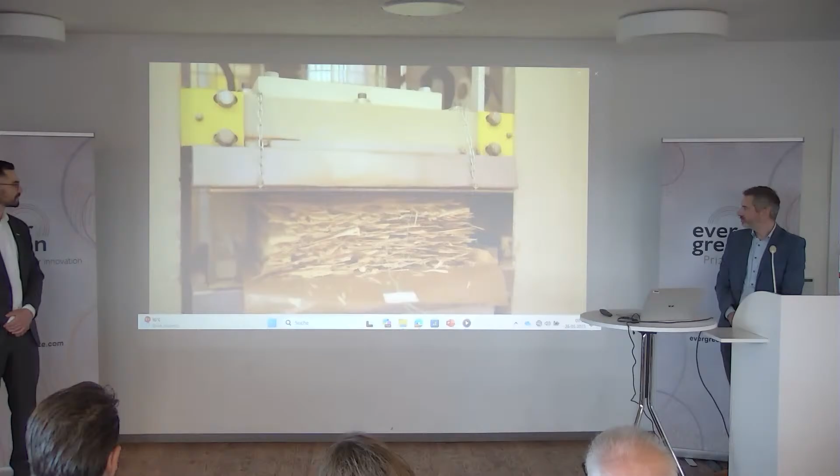At Boku University in Austria, a research team led by Max Pramreiter focuses on the use of branch wood as a raw material. A 3-dimensional measurement captures the geometry of the entire tree with special attention to its branches. The aim is to process this irregular and curved resource into high-strength wood-based products. The branches are processed into strands, which are dried, sorted, and pressed. Stranding is a very efficient technique from the OSB process, recovering up to 95% of the input material. However, branch wood, especially from hardwoods, has not been used this way before. The potential of the material is determined by meticulous analysis throughout the entire process, beginning at the nanometer scale and extending to the macroscopic structure of the tree. Their work lays the scientific foundation for integrating branch wood into long-lasting wood construction products such as panels, beams, and future composite materials.

Dear esteemed scientific jury, good morning to everyone in the audience, good morning to everyone attending this prize event online. For Max and myself, it's a great honor to be here today and present in front of you and answer your questions. Honestly, yes, I'm very excited, especially as a PhD student.

But there is one thing I'm even more excited about, and that is the figure of 3 trillion. There are about 3 trillion trees on this planet doing all these great things that are vital for us humans. Statistically speaking, that means about 400 trees per person - 400 trees for Max, 400 for you, 400 for me. And if you visualize your 400 trees, they do not only consist of stem wood, but also huge amounts of branch wood. These branches are the main focus of the next minutes.

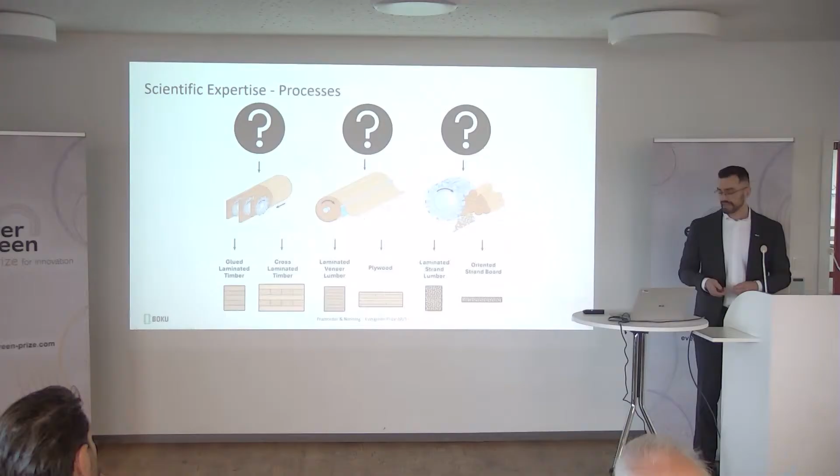Thank you, Tobias. I think you're absolutely right. I'm not the only expert on disintegration technologies, but I spent a lot of years investigating established disintegration technologies for current engineered wood products. Right around the time the Evergreen Prize was announced, we were revisiting existing technologies to disintegrate branch wood. As wood technologists here might know, the sawmilling process and the veneer peeling process require homogeneous raw materials.

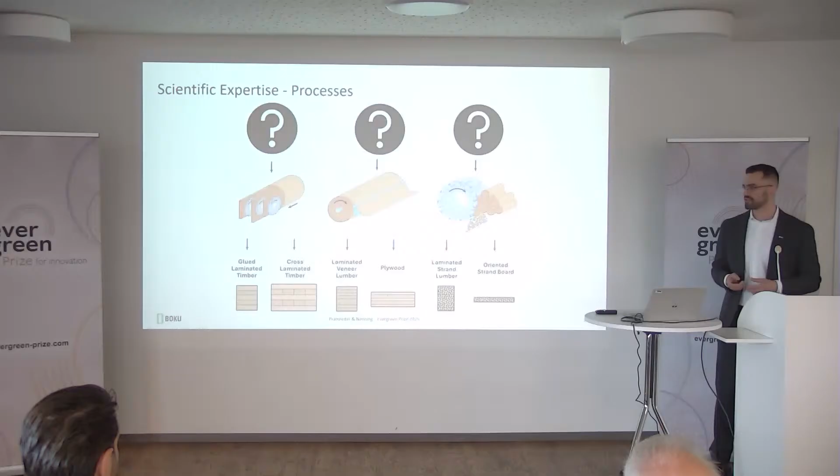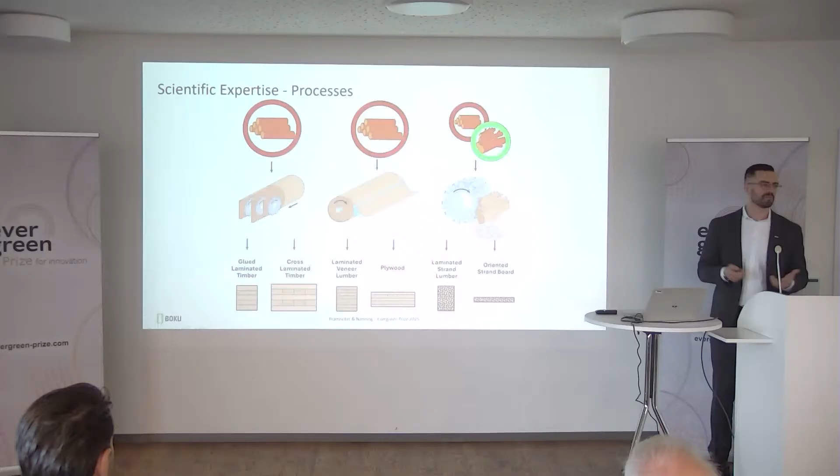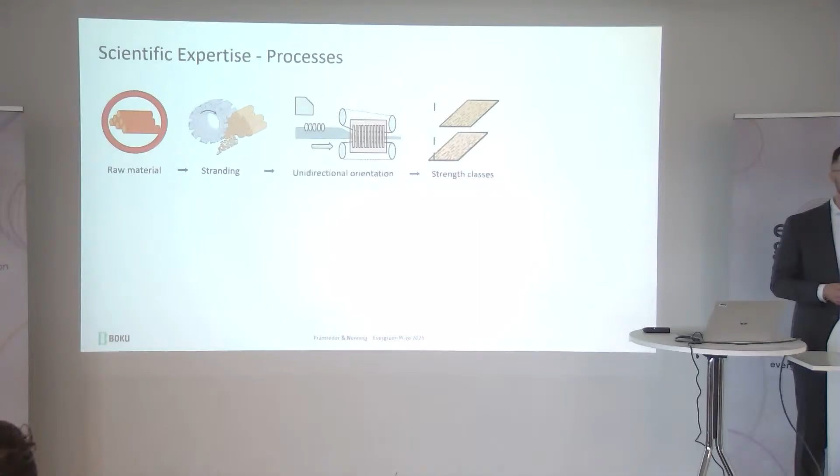Luckily, we also have experience already improving the stranding process and the products from it. While Tobias was looking at branches, two of our other PhD students, Lucas and Andre, who is here today as well, so you can talk to him in the break if you want,

were looking into improving the application potential of strand-based products. In a project called Unistrand, led by Professor Konnerth, around 15 project partners are trying to improve the application potential by unidirectionally orienting the strands, and by creating different density panels, also improving the range of strength classes we can use.

Furthermore, the aim here is to create an intermediary product that can be used for a cross-laminated composite, and that can exist alongside the current shooting star in wood construction: cross-laminated timber.

From literature, we know that with panel density we can also change the performance of the panels, and we try to build on this knowledge by adding the unidirectional orientation.

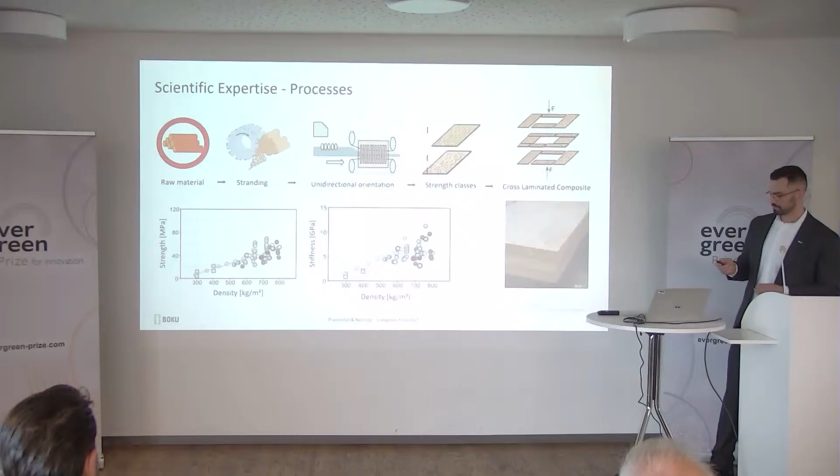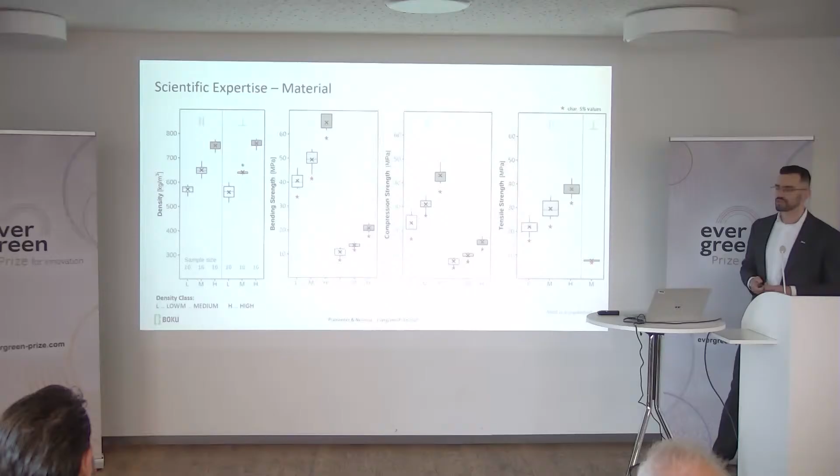Most recent findings from Lucas, which I want to show quickly, show that, I guess not a big surprise, we were able to create different density panels. But the interesting part, and I think the biggest takeaway here, is that we are actually able to create different strength classes along bending, compression, and tensile strength, and the same for the modulus. If you look at the red stars, you can see we are actually able to design strength classes depending on the purpose and final application. Therefore, we can use the material more resource efficiently, only where it's actually necessary.

The way forward: when the Evergreen Prize was announced, we thought this combination of projects, Unistrand and Strong Hardwood, might be the right case for applying to it. As both projects are ending this year and funding is limited, in order to combine this knowledge into Branch Up, we need additional funding.

If awarded, we will create a new project team, hiring a new PhD candidate. This is also where most of the funding will go, paying the salary of this PhD candidate. The project team at BOKU will be complemented by Tobias and myself, and academic supervision will be provided by Professor Konnerth. The PhD student will also be embedded in the doctoral school Built Nature at BOKU, which covers the whole range of construction, so they will have access to an interdisciplinary team of supervisors as part of their advisory team.

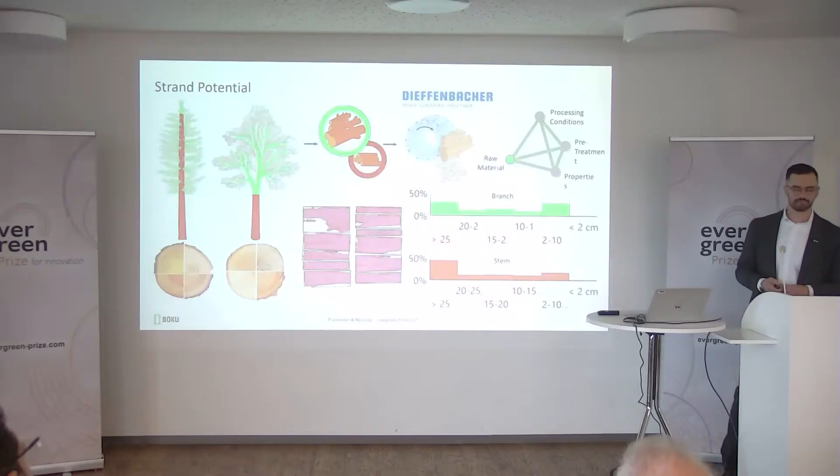As an example, one important factor is the length of the strands in strand-based products, as slenderness drives performance as well, and we expect the branch strands to have higher variability across different length classes. At the end of this work package, we also expect a certain data set that can be used for modeling this material, as we have an intermediary product described.

With the remaining strands, we will create different panels at BOKU University using the same process or procedure that we developed for Unistrand, giving us a big data set to compare it to as well.

Following this, mechanical as well as physical characterization will take place. The physical characterization will include thickness, swelling, and internal bond strength as key characteristics for engineered wood products, on top of tensile, compression, bending, and shear tests.

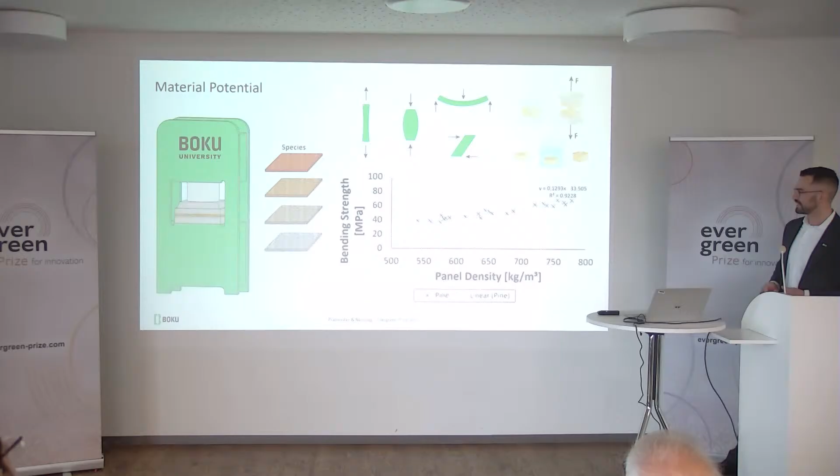The hypothesis here is, if we take pine as a reference at different compaction ratios resulting in different densities, we expect that the strands and panels from branch wood will sometimes perform better than the panels from stem wood, and probably some will not reach the current benchmark.

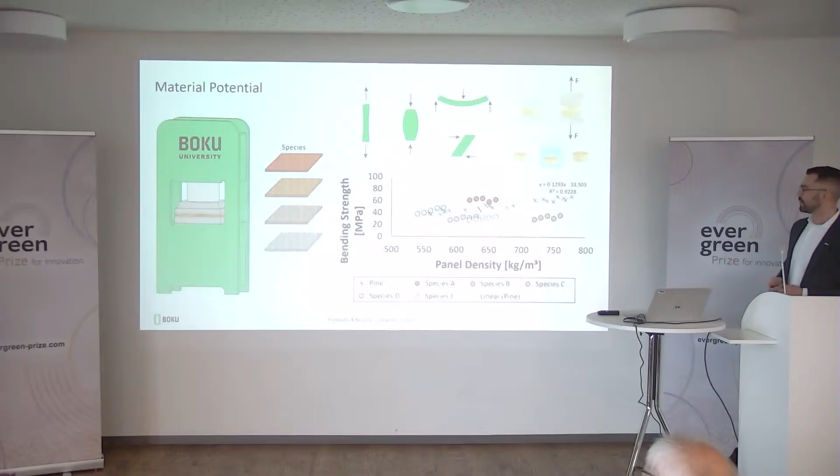Last but not least, together with Dieffenbacher, we will decide on a range of density classes, coming back to the different strength classes again, and a range of mixtures. What do I mean by mixtures? We know from literature that mixing different wood species into one panel, we can offset the downside of one by the other a bit.

So we talked a lot about the scientific details of branch-up, the previous projects, and what we want to do in the next 3 years. To sum this up on one slide, we would say branches have technological potential. So let's branch up together and help move from a burn to a build mentality for this undervalued resource.

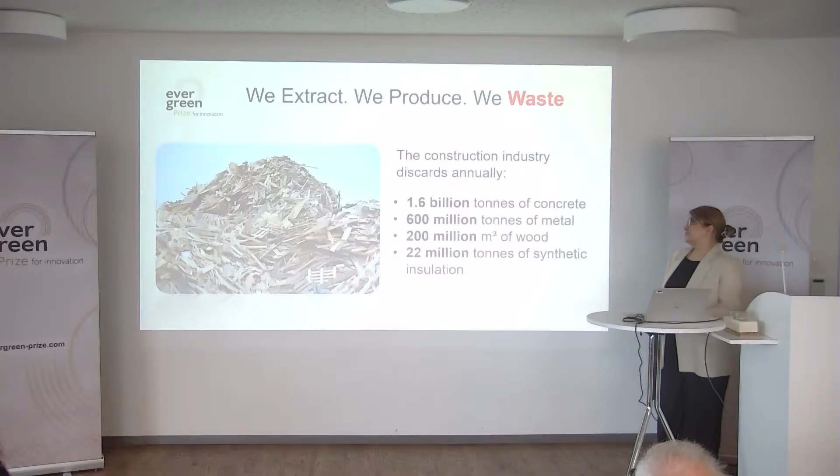And then we produce. All these materials are turned into something that we build our cities with. We build large, we build very fast, but without so much thinking of what comes next. We also produce a lot of waste. Construction industry generates mountains of discarded waste. Concrete, metal, wood, they are usually thrown away or treated like they are endless. So in general, we extract, we produce, we waste - a one-way path that our planet or nature can't take anymore.

And it's not only about the material intensity of our construction industry, it's also about the emissions. Construction industry is producing almost 11 billion tons of greenhouse gases every year. And it's not only about the CO2 that we are hearing every day. There are other gases, thousands, 100 times more potent than CO2, like methane and also nitrous oxide. So it's not only a material crisis, I would say, it's a climate crisis.

So what sort of future do we want to build for ourselves, for the next generation to come? That's our vision: to create a world where resources are valued, waste is minimized, and nature thrives for the next generation to come. To have such a beautiful world, what are the alternatives that we have?

We just take a look at wood waste as an example. Every year, millions of tons of wood waste are generated. In Europe alone, in 2020, almost 50 million tons of wood waste was generated. Almost 53.5% was burned for energy recovery, and only 46% were recovered to material, something like particle board. And of course, energy recovery is important, but material recovery should come first, because every gram we reuse, it's almost 2 grams of CO2 that we store, we keep in the material for a longer time.

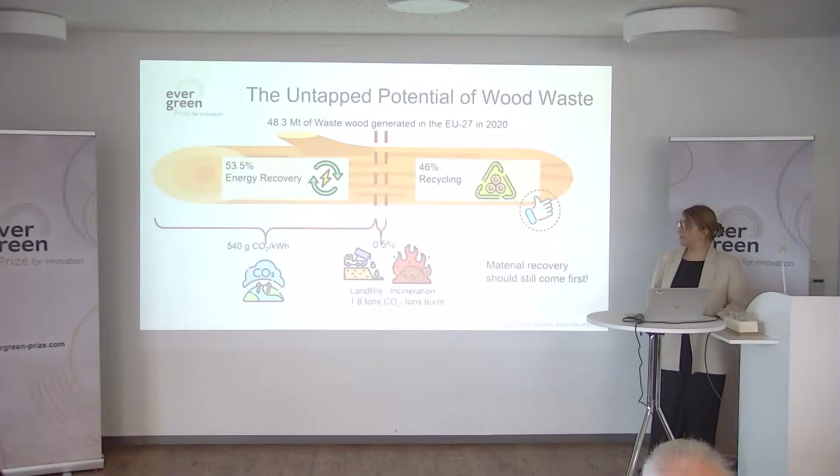And that's what nature does always. Nature wastes nothing. Everything is recycled, is repurposed, and it's regenerated. And that's what we should do from now on.

So what if we turn to a regenerative material which turns back to the earth, which is built in harmony with our planet, with our nature? So we can start with using waste more than what we do and bind them together without anything additional, just with the help of nature.

So in our experiment, we are exploring ways of using regional, local wood waste and agricultural waste collected from sawmills, from furniture producers, from discarded pallets, and also the byproduct of agriculture industry like hemp and miscanthus, combining them with mycelium, the root network of mushroom, to create a regenerative bio-based material.

So the core innovation lies in mycelium. It's not us, it's nature who does the job. But why are we so much interested in that? Because it has this self-adhering property to the fibers. It forms beautiful cross-links with the substrate, so it acts like a glue. It grows really fast, and it's also using really low energy.

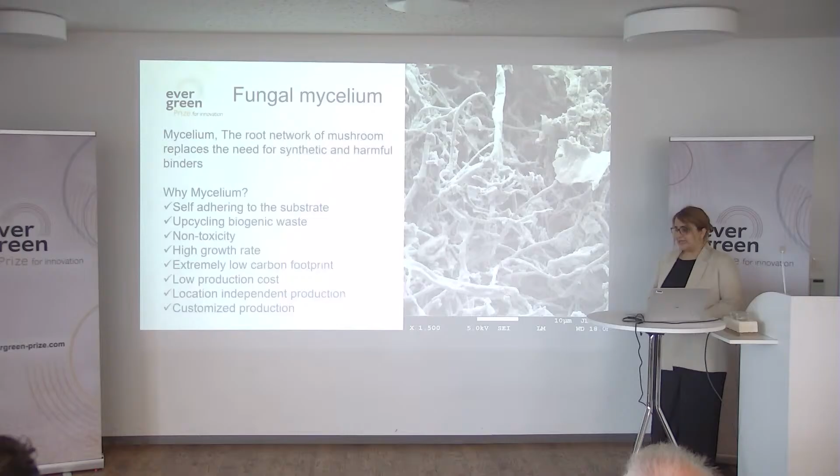So at the end, it turns waste into a material which is 100% bio-based and recyclable. So we have a local, low-cost, and low-carbon material. It's perfect for what we need for our future.

But it's not only any type of mushrooms or fungi that we use. We are mainly focusing on wood decaying fungi. That's what we usually see when we walk into the forests. They are our ecosystem recycler or ecosystem engineer, and our main focus is on white rot fungi. They're digesting these tough plant fibers like lignin and cellulose through an enzymatic pathway.

If we look at this time lapse taken by us, not in the most professional way, we see how mycelium grows. It grows into the wood, around the wood, and it forms this 100% bio-based composite, which is safe, which is scalable. It's waste not burned to pollution, but turned to possibilities.

So thank you, Nas, for telling us about how we need mycelium-based materials made from mushrooms. Next, I'll be telling you more about the properties and also the production process of this material.

As you saw in the video, when the fungi is added to the particle substrate, it grows and spreads very quickly, turning the substrate with the mycelium into a block piece of material. This is a very lightweight piece of lignocellulosic foam.

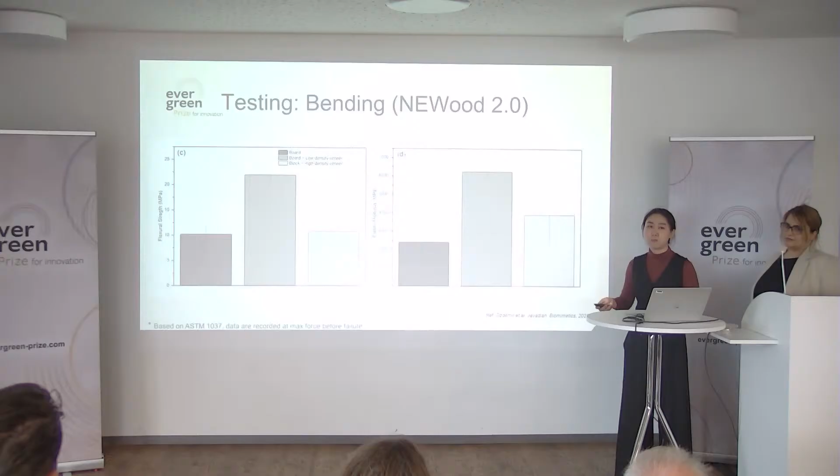We have also conducted some preliminary fire testing, and what we found was that the light material, the very low density material, is actually a very good insulator. This is because there are many air pockets in the material, and that helps insulate the heat from the inside and the other side of the material during testing. We also found that it does not emit any harmful or toxic gases into the environment because it's completely natural, so you will not have that strange mixture of nitrous oxide and other harmful gases mentioned by Nas just now.

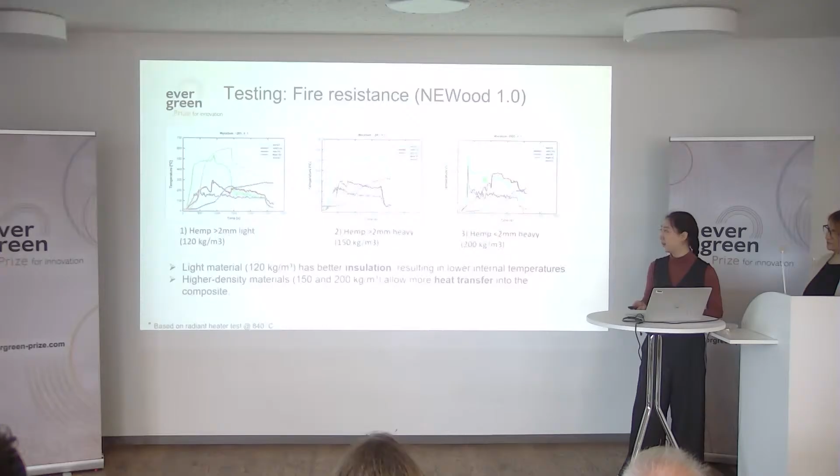We also compared the performance of NEWood against other commercially available, functionally similar materials. For NEWood 1, we compared it with rock wool, a very common insulation material used in buildings nowadays, and found that it has very similar thermal conductivity and sound absorption properties. It is denser than rock wool, but the strength is that it is actually much stronger, giving it self-supporting and better structural stability properties.

We also compared NEWood 2 with medium density fiber boards and particle boards, and found that it has very similar strength and density to these conventional building materials. Because of this, we are very confident that we can apply this to many different commercial applications that currently use medium density fiber boards and particle boards.

When we talk about green materials, we have to think critically about whether it is really good for the environment. So we conducted a life cycle assessment on our material. We modeled the production process of our mycelium-bound composites into three different stages, and for each stage we calculated the inputs and outputs. The three stages are: the growth and culture stage, the incubation and inoculation stage, and the processing stage for the final products.

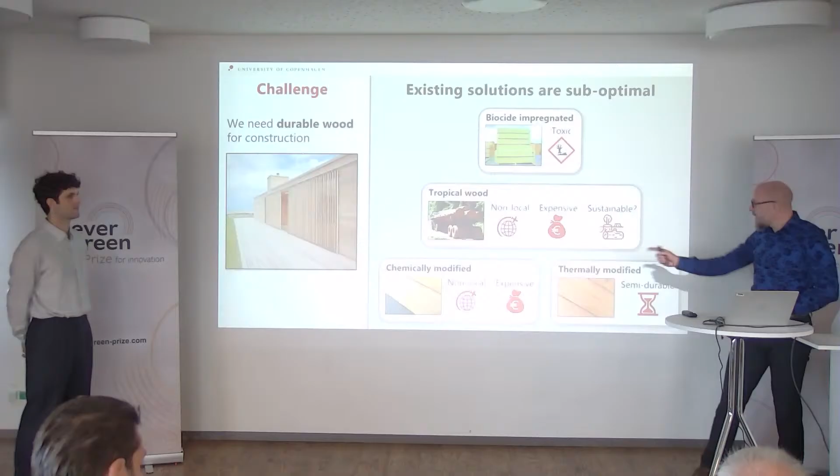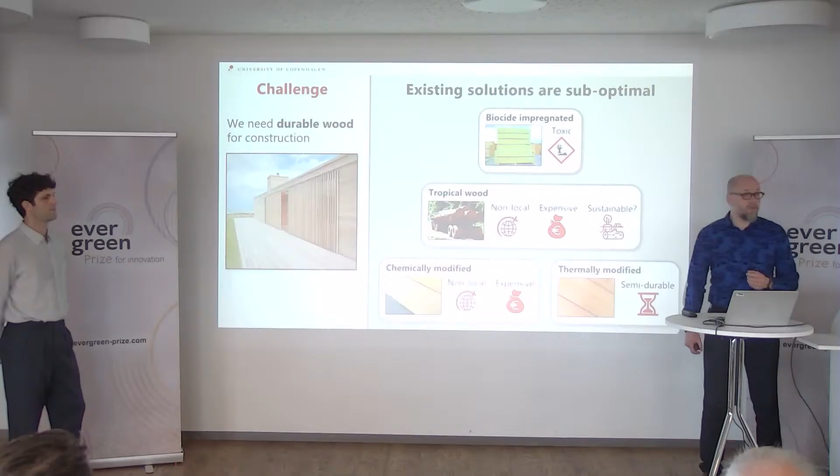Of course, we have modified wood products on the market, like chemically modified wood, which is high performance material. But these are also based on non-local wood species, and they are quite expensive. And thermally modified wood is only semi-durable, and it's not good for ground contact. So we need new solutions for durable wood in outdoor environments.

Around the time that I made this living fence around our fire pit, there were some interesting things happening in our labs. Our team has for years worked on lignin.

Lignin is a main component of wood, and it's also the component that protects the material from fungal decay by making the wood less attractive as food for fungi. Many fungi would not even touch lignin. Lignin is also a large-scale byproduct from the paper industry that has so far been difficult to utilize because it's very heterogeneous and insoluble in water.

But our team discovered a way to fully solubilize lignin, all of it, to make stable, highly concentrated solutions of lignin, up to 65% lignin, using just simple mixtures of water and alcohols.

These solutions were initially intended for use as fuels, but we thought, hey, since lignin has such interesting properties when it comes to protecting wood from fungal attack, could we perhaps add more lignin to wood and gain more of these protective qualities?

And that's why we called upon Andrea to help us out, to see if these novel lignin solutions were any good. Could we impregnate wood with them?

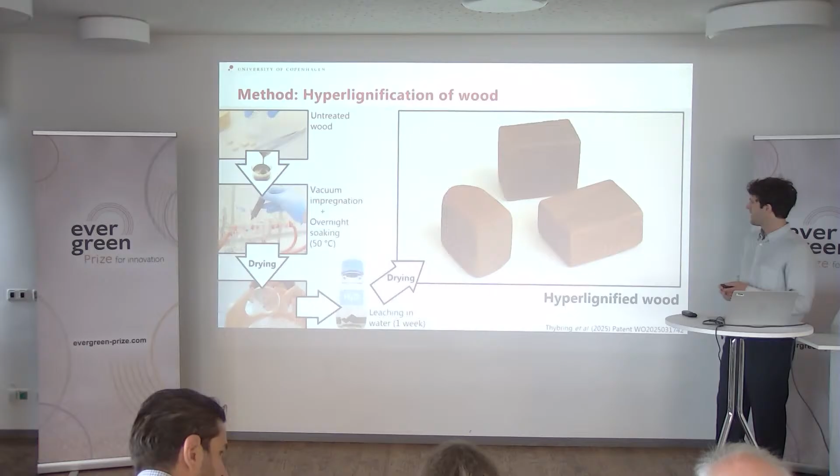So this is what we got at the end, and it really felt like deep penetration, and we call this hyperlignified wood. But how much lignin did we squeeze into the wood?

A lot. The mass gain was also very surprising and unbelievable at first glance, so we reached almost double the weight in some species. We tested this hyperlignification across several species, broadleaf and conifers, and even after leaching, the lignin stayed in the wood.

So then we wanted to know how this would affect the properties. One of the key properties we wanted to address was hygroscopicity. So we used water contact angle, and we exposed the cross section, which is the section that most readily absorbs water, of our samples, both untreated and hyperlignified wood.

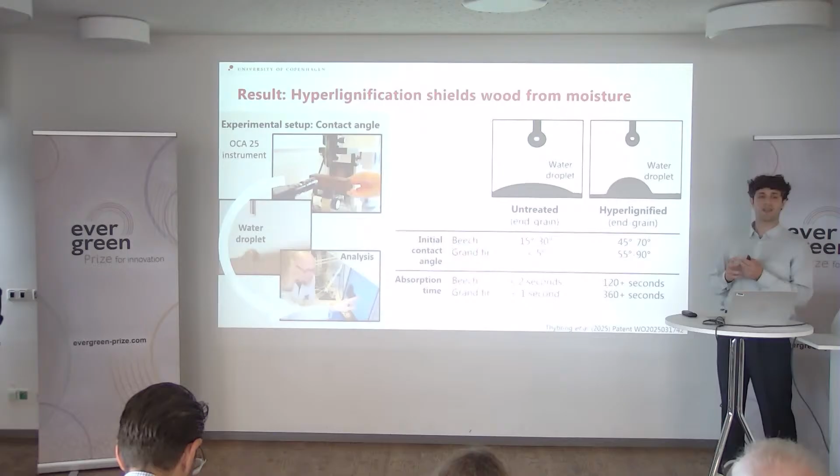We saw that these droplets that we were dropping on the surface were being readily absorbed by the untreated samples within 1 to 2 seconds, while for the hyperlignified wood, it takes minutes to absorb. So the energy of the surface is lower, meaning higher hydrophobicity.

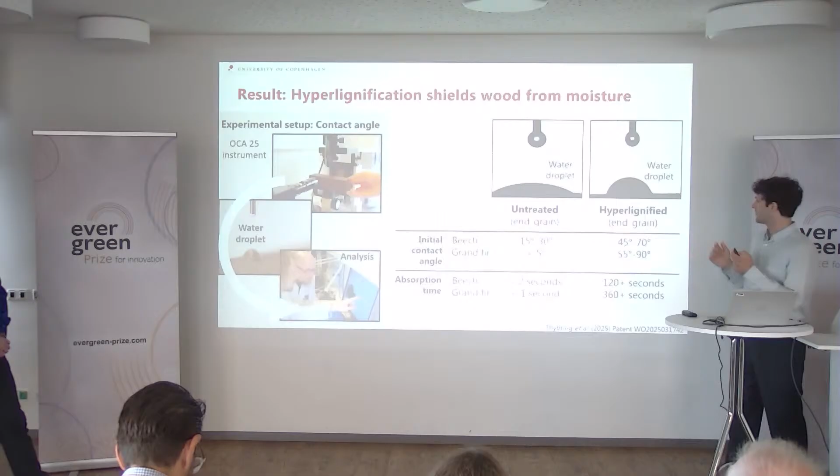Then we took it a step further, and we wanted to address the durability. How does this wood behave against fungal attack? That was our main question to address.

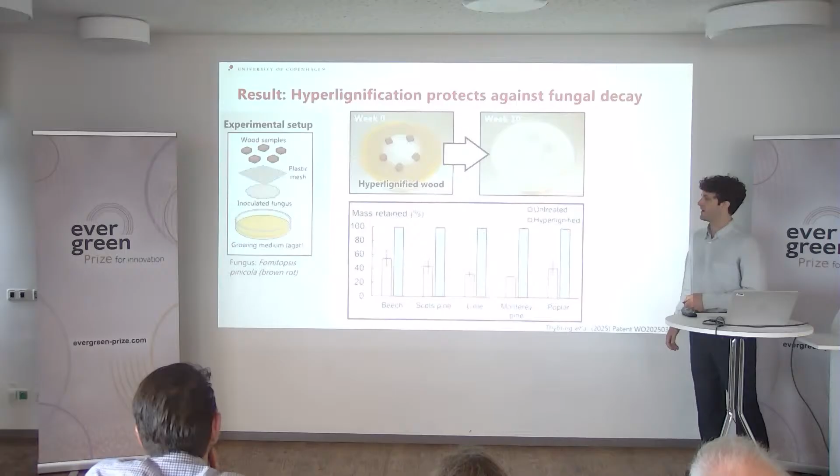So we set up a fungal decay experiment, and we used one very aggressive fungi that we had tested in our lab before, Fomitopsis pinicola brown rot, and we exposed the samples to this brown rot for over 10 weeks.

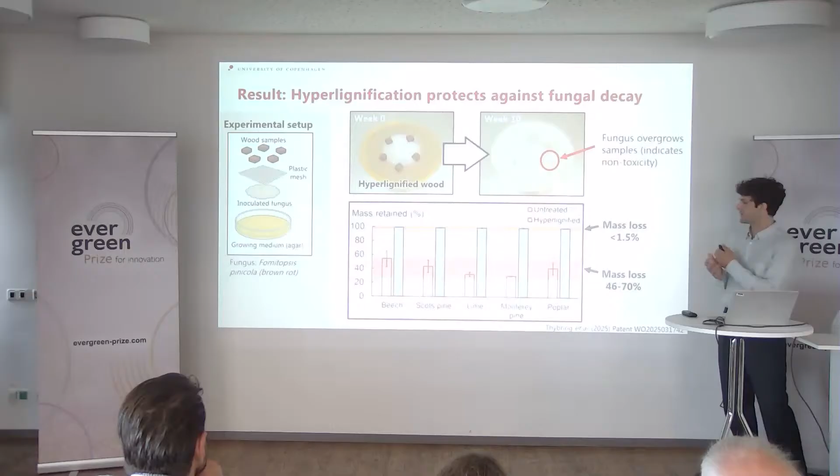What we see here is hyperlignified wood after 10 weeks, and actually the fungi could overgrow the samples, which is an indication that it is non-toxic. The hyphae could grow around the wood. But when we looked into the mass retained or mass loss in hyperlignified wood across all the species we tried, the wood was barely untouched, while for the untreated samples there was huge mass loss after 10 weeks.

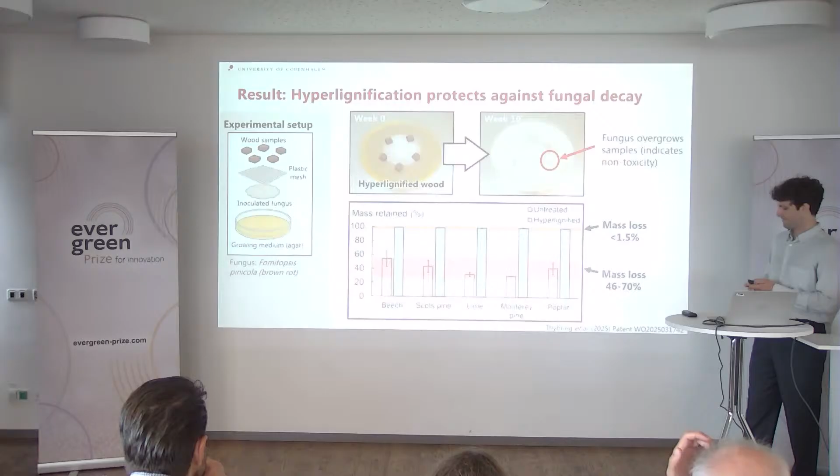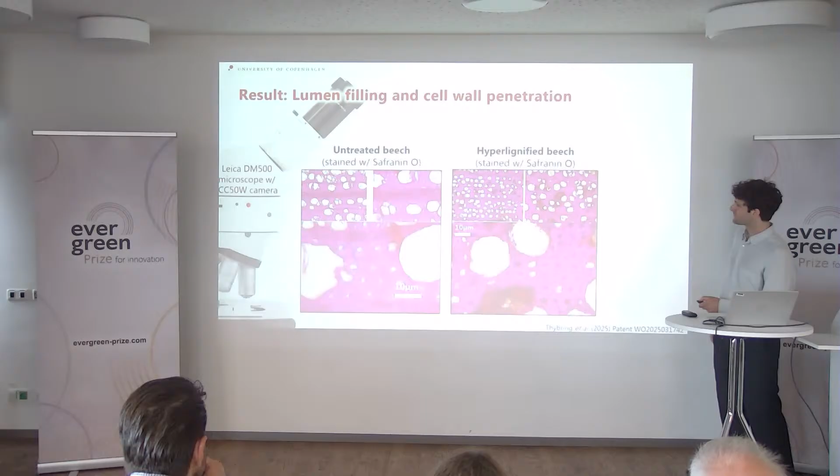How did these work so well? So we literally zoomed in, we took microsections and used a stain, safranin, which targets lignin substructures and makes it look purple under our eyes. And what we saw here was quite revealing, because we could see that the lignin impregnates the voids, which are the large vessels and small fibers.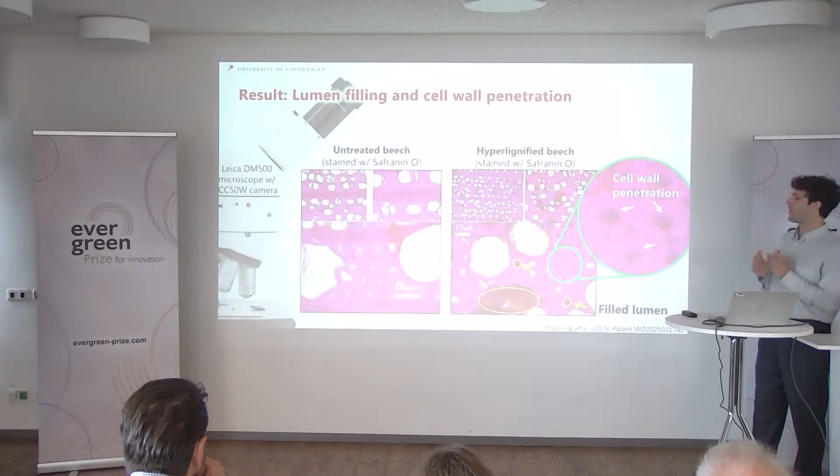So the lumen of the fibers and vessels were impregnated. But not only that, if we zoomed in, we could see there is a darkening around the cell wall, meaning that this penetration is not just surface level or blocking. So we are modifying the structure, and we think this is the key for the long-term durability we see.

But lignin is not very homogeneous out there, so there are lots of types. Do they all work? We tested several and found that the ones that work best are the ones that are less water soluble, because the others don't stick very well to wood. Luckily, kraft lignin is one of the main byproducts from pulping and paper companies, so what we are actually using is the one most readily available in the market.

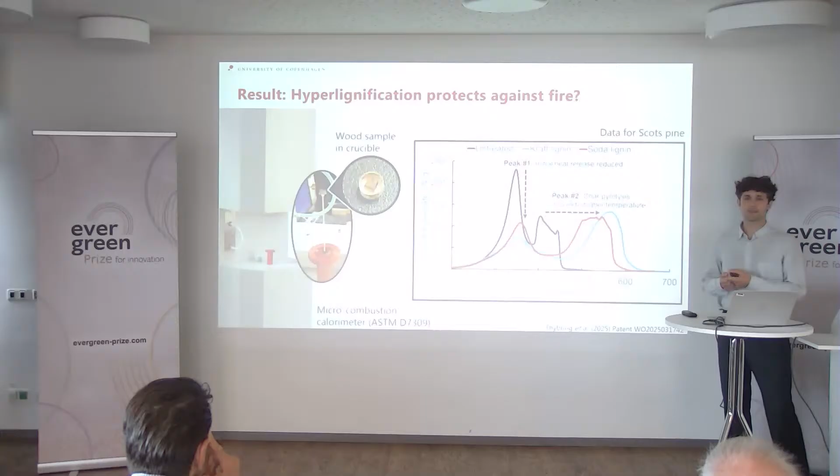Then we wanted to test fire retardancy, and we saw with microcombustion calorimetry that the initial heat release was reduced when we burned hyperlignified wood, while the char pyrolysis peak moved to higher temperatures, meaning that not only did we improve the fungal decay resistance, but here we are also seeing an improvement in fire retardancy of the wood.

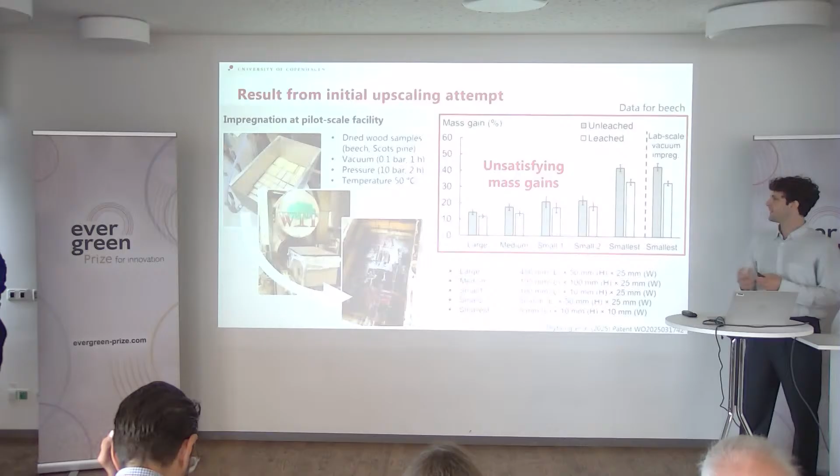And then we took a step forward, and in a first attempt tried to upscale this, going to an industrial facility and asking ourselves if we could just plug and play into an existing facility. We brought our small samples, but also larger samples, to a pilot scale industrial facility, using pressure and temperature of 50 degrees, nothing fancy. We saw that although we got unsatisfying mass gain in some larger samples, lower than small scale, the key point was that we were able to use the facility without changing parameters, without big modifications, and with no safety hazard.

So very excited about this. We came back to the lab thinking, okay, now we need to improve this impregnation at larger scale, but we need a lab to do so. So we developed a larger vessel for impregnation of larger, longer samples. And yeah, this is what we're doing at the moment.

Our aim is to reach the mass gain we saw at small scale, and we're not too far from there. For example, with each sample we even have higher mass gains than the smaller samples. Yes, and you have samples in front of you in the jury.

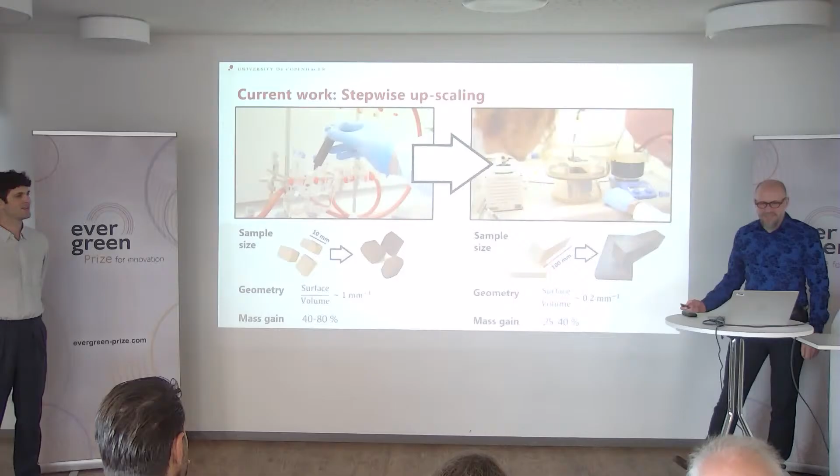So clearly there's more to do, more to explore, because hyperlignification with lignin solutions is such a new research topic. So in the next step, we want to focus on some fundamentals, like the effect of lignin size and lignin chemistry, and how these lignin solutions are transported in the wood anatomy and how they interact with the material. Let's take the first one first: the effect of lignin size and lignin chemistry.

I know this is a busy slide, but please bear with me. In order to investigate this, we want to try to reduce how heterogeneous lignin is when you get it from the paper industry, because when you get it from the paper industry, it's a zoo of lignin molecules of different sizes and chemistries.

So we want to use solvent fractionation, a method that utilizes the fact that the solubility of lignin molecules in a specific solvent depends on the size and the chemistry. By having different solvents and using them sequentially, we can split up this initial broad size distribution, this initial soup we have, into different lignin fractions that are more well defined with a narrower size distribution, making these fractionated lignin solutions. We try to use these to better understand what's actually going on during hyperlignification.

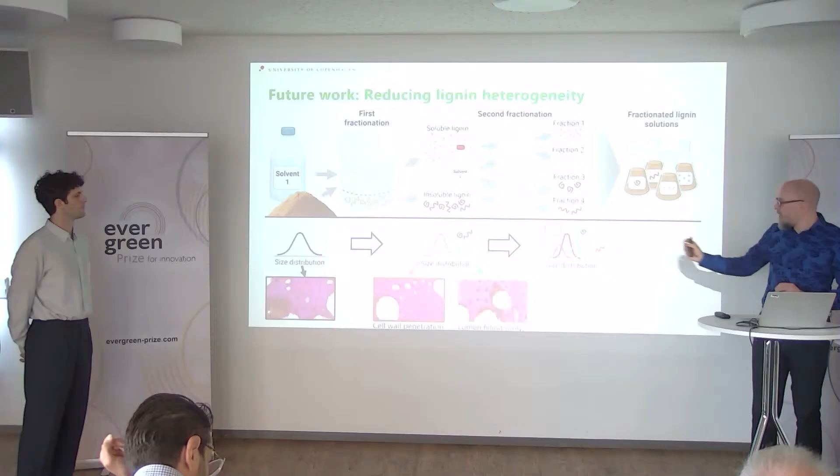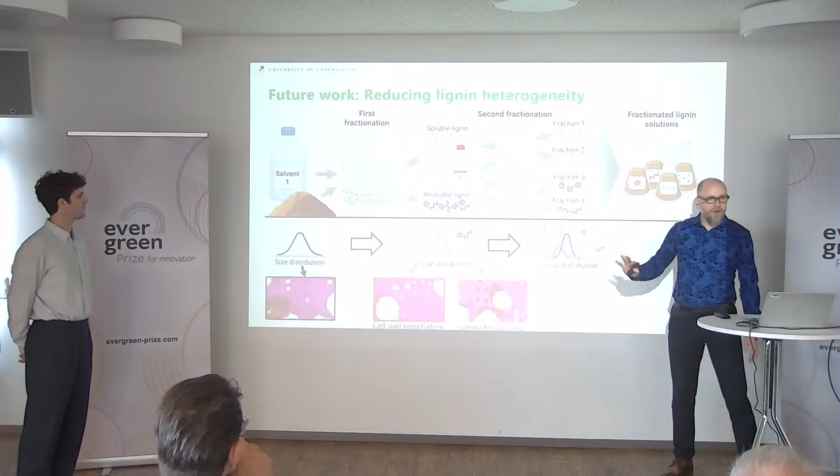We did it once, where we split up this paper lignin into two fractions, small molecules and large molecules. What we saw was interesting: the small molecules penetrated the cell walls but did not fill up any lumina, whereas the large molecules only filled up the lumina but did not penetrate the cell. So we have these two different effects Andrea was talking about, where you fortify the cell walls as well as provide a physical barrier to fungi in the pore structure.

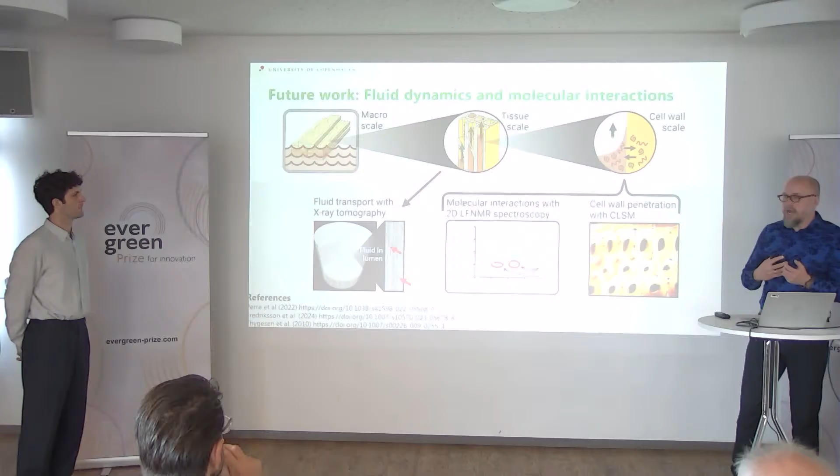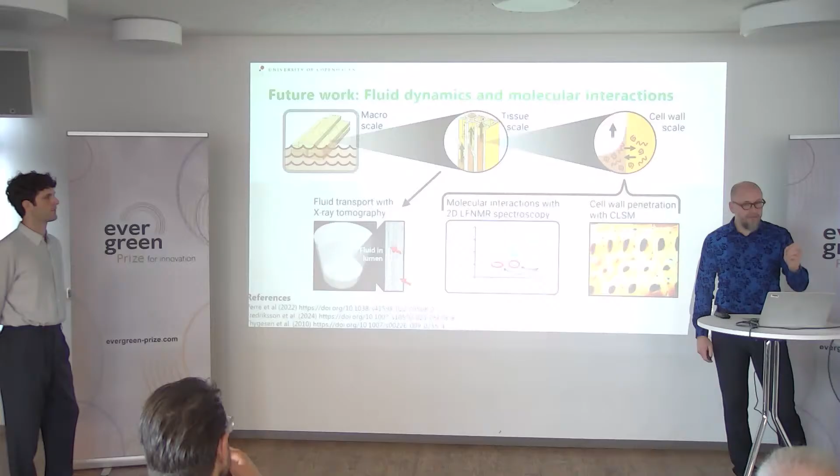We want to go further down this route and study how more well-defined fractionated lignin solutions are transported in the wood structure and how lignin molecules are migrating into the cell walls. With regards to fluid transport, we plan to use X-ray tomography. For understanding and seeing this penetration of cell walls, we are using confocal laser scanning microscopy or similar techniques. For the interaction, we want to use spectroscopic techniques to see how the fluid and the cell wall interact, using techniques like low-field NMR. Basically, we want to better understand how these solutions behave in order to make even hyperlignification work even better.

But boy, what a ride it's been since our team first discovered how to make these highly concentrated lignin solutions. Then when we started to impregnate and highly lignify wood, we've seen a booming interest from industry stakeholders. So now in our work, we follow two tracks. We have a research track where we try to better understand how these lignin solutions behave inside the wood, and we have an innovation track that goes more towards technological development and upscaling, towards eventually launching a spin-out company in the near future. The reason we can push forward in multiple tracks is because we have quite a broad and strong team with different expertises involved.

I myself come from civil engineering and wood science. Andrea has a background in nanoscience, but we are luckily surrounded by specialists and experts in biorefining, biotech engineering, lignin chemistry, as well as very skilled lab technicians. With regard to the innovation track, we have an industrial advisor as well as a business advisor involved. So we feel quite confident that we can push forward both in terms of the science and the technological development.

And we believe that hyperlignification has massive potential impact, because the situation today in Europe is that the paper industry produces 11 million tons of lignin every year that's been incinerated in the paper mills, whereby the carbon from the lignin is released to the atmosphere as CO2. At the same time, in Europe we're producing 6.5 million cubic meters of biocide-impregnated wood every year. And we would like to change that.

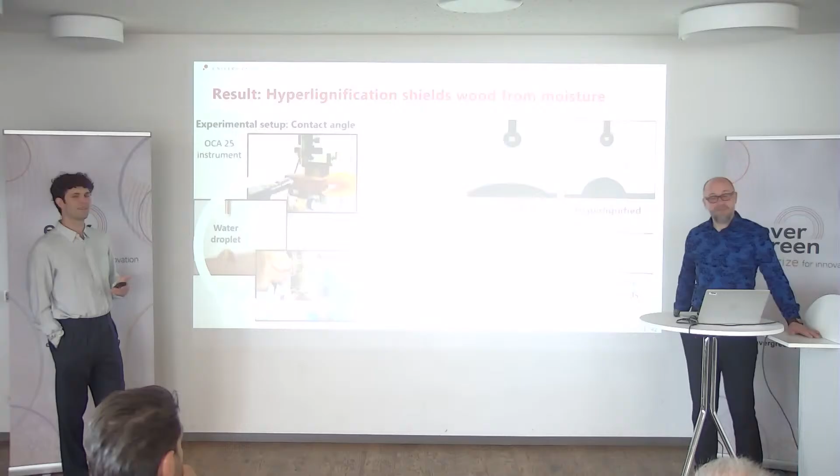We haven't looked at bonding, because initially we tried to compete with tropical wood products - poles, railway sleepers, whatever you make and then use. But it's a really good point regarding bonding. And on dimensional stability, we actually haven't tried it yet, it's in the planning.

What we expect is that since some of these molecules penetrate the cell wall, there's a bulking effect, meaning there's less space for water, so we expect it to swell less and be more dimensionally stable. That's also a reason we expect it to be very durable - the wood is more dry compared to other modified wood where you exclude water from the cell wall, creating a more stable material that's less attractive to fungi.

Yes, we could see when doing water contact angle tests that the water absorption is quite different - it looks like the lignin is blocking pores in the other direction too, not only in this region. It confines the absorption of water to the spot where the droplet lands. In this case it takes 2 minutes to absorb, but we can see it's more confined - it looks like the bulking affects the spreading of moisture within the structure.

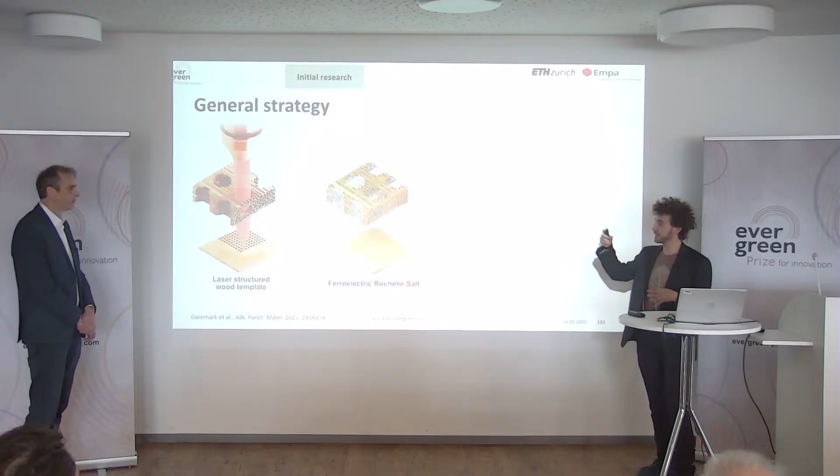And as we published in the Advanced Functional Materials Journal, our strategy starts by precise lasering of the wood to get a wood template. This wood can be poplar or other underutilized woods, and this will then allow us to use the wood as a mold to grow the ferroelectric Rochelle salt. The interaction is very good, and then what we need to do is extract the electricity.

And we don't only want to have a bio-based piezoelectric device, we want to have a fully bio-based device, not just composite. Hence we use a fully bio-based ink developed in our lab. We do so by simply applying a paint, like you saw Maria doing in the video, and then we laser the device to achieve catalyzed carbonization. This work was done together with Innosuisse and the Bauwerk group.

If we look back at the second step, more strategically at how this crystallization works, we can see that the laser-drilled wood allows for a very porous structure. We then use a hierarchical porosity from wood to grow the Rochelle salt through the wood template, creating a very good interface between the Rochelle salt and the wood. This allows us to overcome the brittleness of Rochelle salt, as we explained.

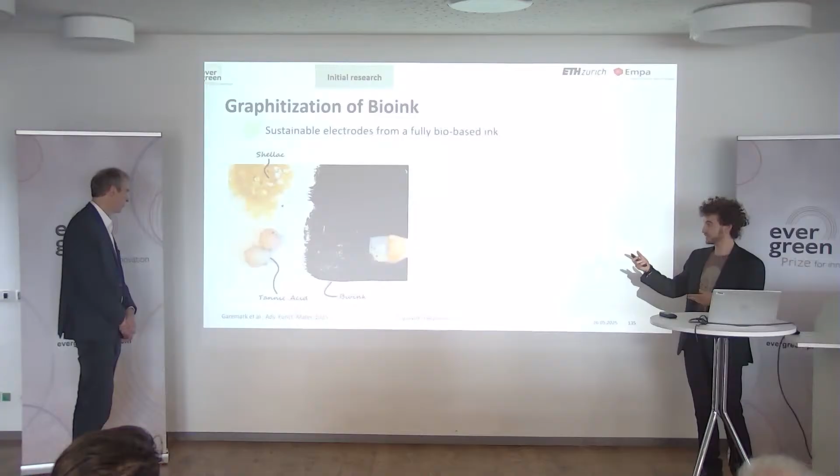Moving further into this bio ink, we wanted sustainable electrodes, moving away from metals or silver, which are very much used in industry, as well as away from adhesives or fossil-based polymers. We did this by using shellac, a resin excreted by bugs, tannic acid extracted from gallnuts, and mixed it with iron to create this black bio ink. We then paint it and graphitize it with a laser, obtaining a composite that's conductive on the surface, with current collectors also made from wood with a conductive surface.

I've shown you the natural origin of everything, but how does our performance compare? When we compare the performance of LignoVolt to commercial standard PZT, it's difficult to choose a specific assessment method, so we chose the tapping methodology, in which we tap and charge a capacitor. We can see that the voltage we're charging goes up to levels where LignoVolt can clearly compete with its commercial standard coin cell PZT that we chose for comparison.

What we were most interested in was how our performance evaluates with different forces, because that's key to knowing how we overcame the brittleness of the Rochelle salt. The strong crystal interface enabled very good signal quality and high voltage performance at high forces. When we increase the force, we can see that the voltage output scaled almost linearly.

When we do repeated taps, we can see, as we also showed in the journal, that we obtain very constant results, and hence very good signal quality. Once again, this is from completely natural products. But how can we see this?

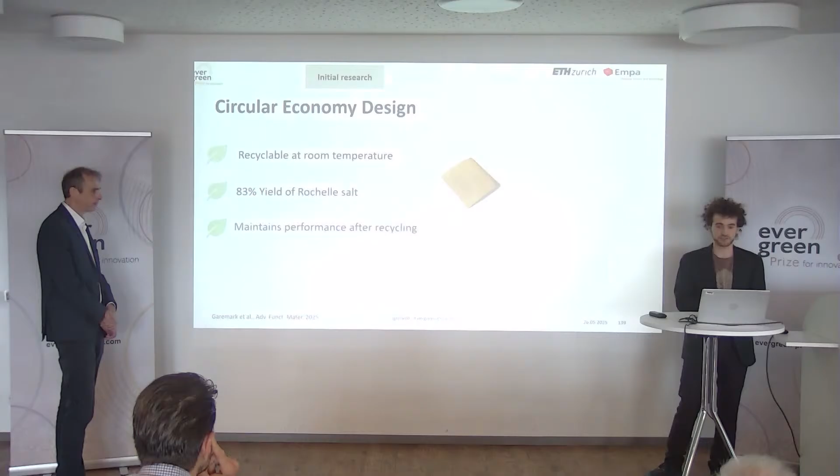Now moving on from natural and good performing, we wanted a fully circular economy design. We saw how we crystallize a natural product and apply a natural electrode on top, but we wanted to revert the circle, to get back to the beginning and see that this was possible. So we were first able to remove the electrode and recycle the shellac.

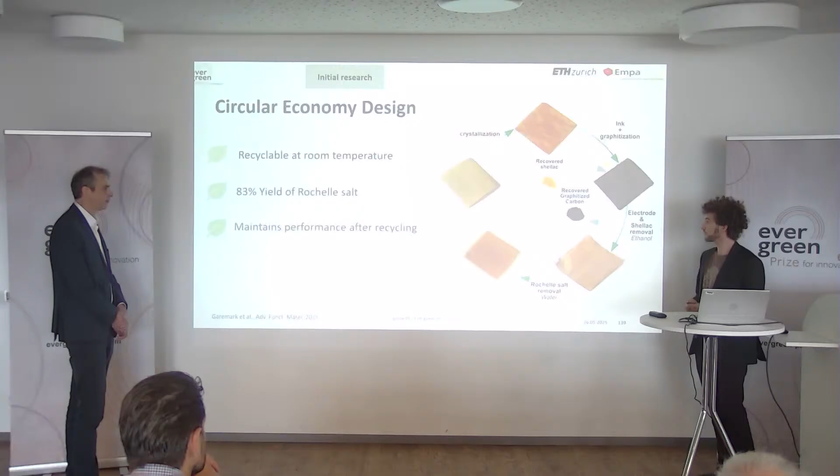We used processes at room temperature with ethanol, so easy processes, and fully reutilized these elements that we recovered. Then we removed the Rochelle salt by dissolving it in water, and were also able to recover these elements, as well as the wood piece, which was also fully recoverable. We were then able to build a new device.

What was most outstanding for us was that we were able to maintain the performance after recycling. And what's very important for me is not only to use natural products, but to avoid so-called greenwashing. So we wanted to look into a global warming assessment, comparing the CO2 that our product emits to PZT.

From this assessment, looking just at global warming potential, I want to remark that we're not looking at, for example, the lead components that can be leached from PZT, and we also didn't look at the recyclability of LignoVolt in this assessment, so this is just the production step. We had 60% lower impact than PZT. PZT was dominated by heat, while we were dominated by electricity from the laser processing.

So we didn't say this was a win, but we wanted to further improve our properties, and this is what Ingo will explain next.

So here we already achieved a 60% reduction, but we thought we should go further when we think about how we would use the money that we could, in case we are awarded. And here it's clear we want to go in the direction of further improving at various ends, and our main focus would be on the scale up. As a scientific group, the papers and articles will come naturally, but the scale up is our challenge, and that's why we want to address this project.

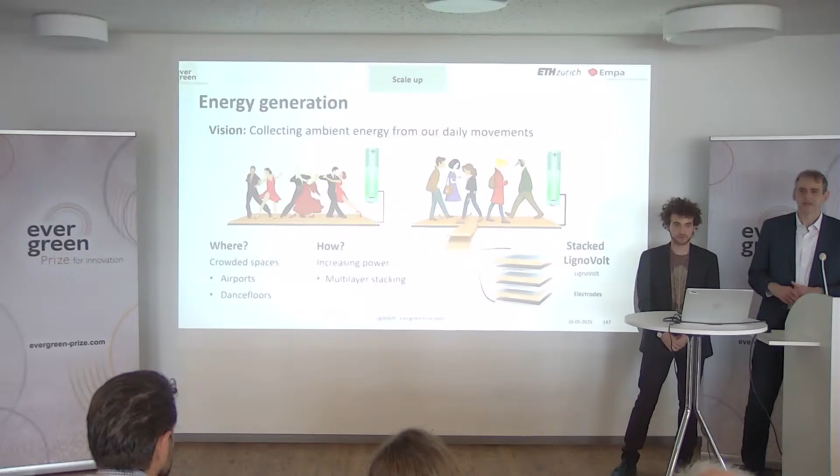What we should also add is that for the moment we work with a maximum of 200 newtons. We also tried 500 newtons and the device doesn't break. Of course this is 200 newtons in this small device, and when thinking about the weight of a person, it would be spread over more area, so it would be equivalent to around 200 newtons or less.

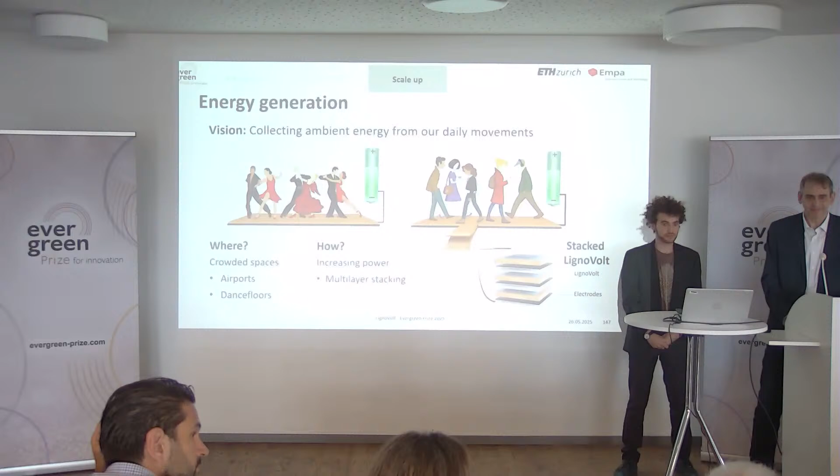I have a question about, again, scalability and commercial manufacturing. You talked about CNC. Have you looked at the cost of big volume manufacturing versus the existing solution? And where do you compare that?

What is very cheap is the material that we use. We made a calculation that a single small device that we produce would cost less than $1. I have to say for the upscaling, it's very difficult to have concrete numbers yet, because we have to see how we stack it. This would still be work to do, but what we try to show is that we already have several ideas how we can ease the process, and how we may also be able to have automation in the process, like with the CNC milling, but also with the individual crystal growth, so that we try to be as easy and lean with all the processes.

And if I can add, Rochelle salt costs about 10-fold less per kilogram than PZT. So it would be even more dependent on the purity that we need. So just from raw materials, we're already cutting down the costs.

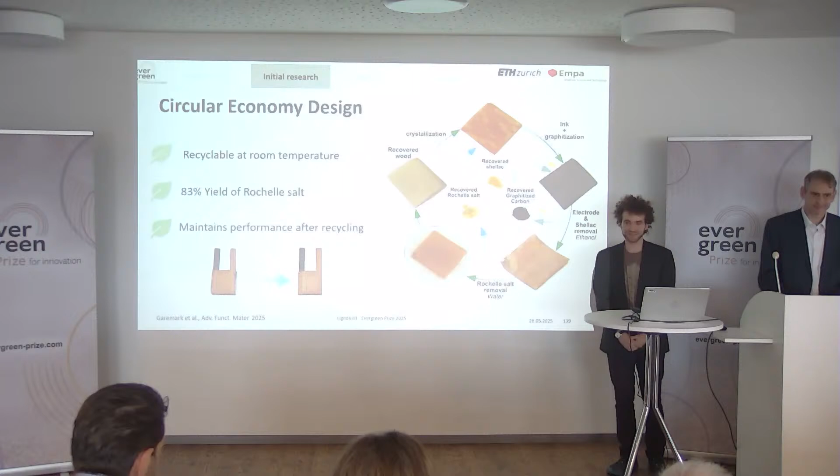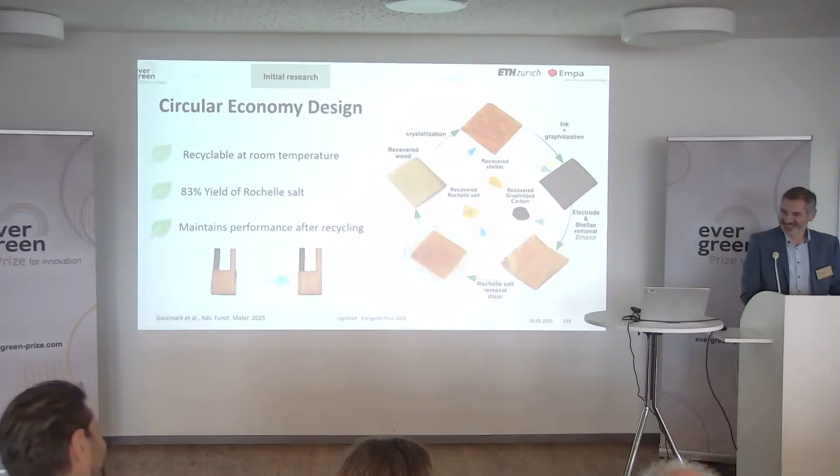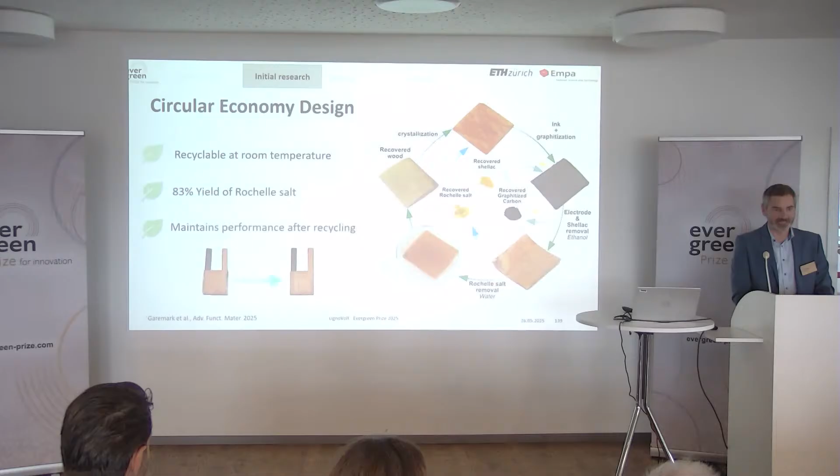I think this was 5 excellent presentations that we had today, and I really think the hardest job now comes for the jury, who have to make this already shortlisting even shorter.